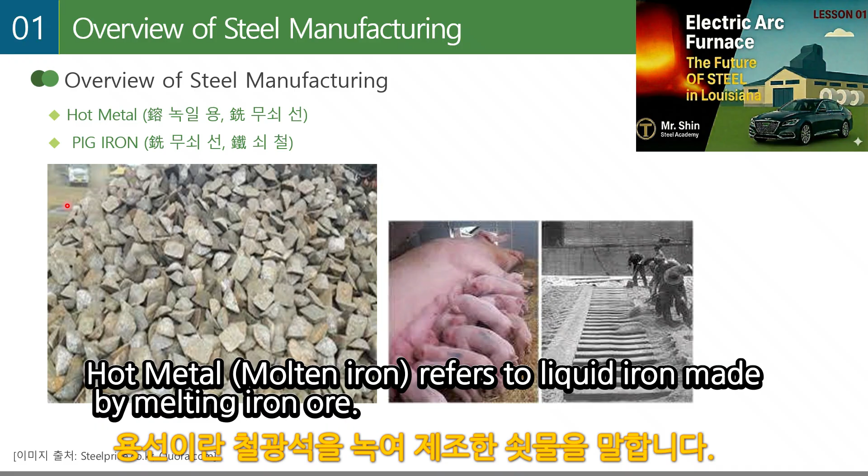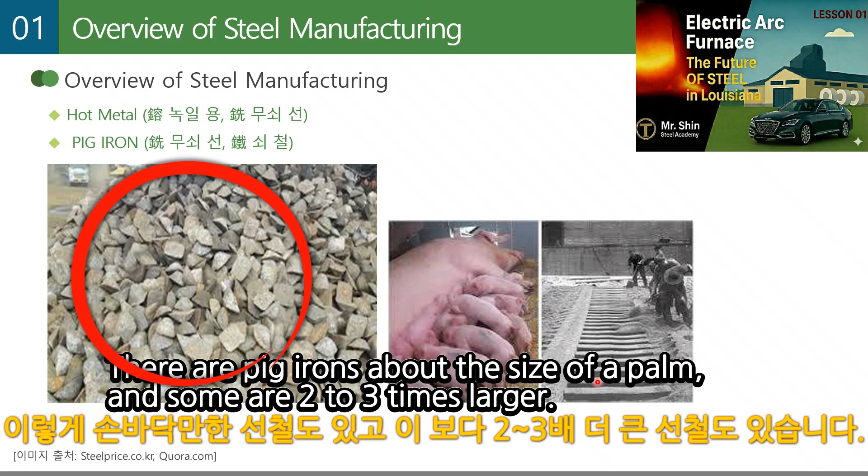Hot metal, or molten iron, refers to liquid iron made by melting iron ore. Pig iron is iron produced by pouring liquid molten iron into a mold called a pig casting machine. Let's look at pig iron, figure 1. There are pig irons about the size of a palm, and some are 2 to 3 times larger.

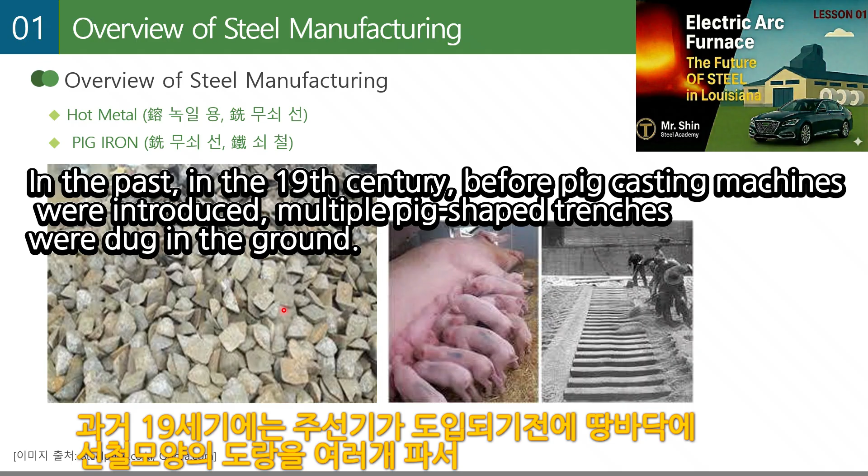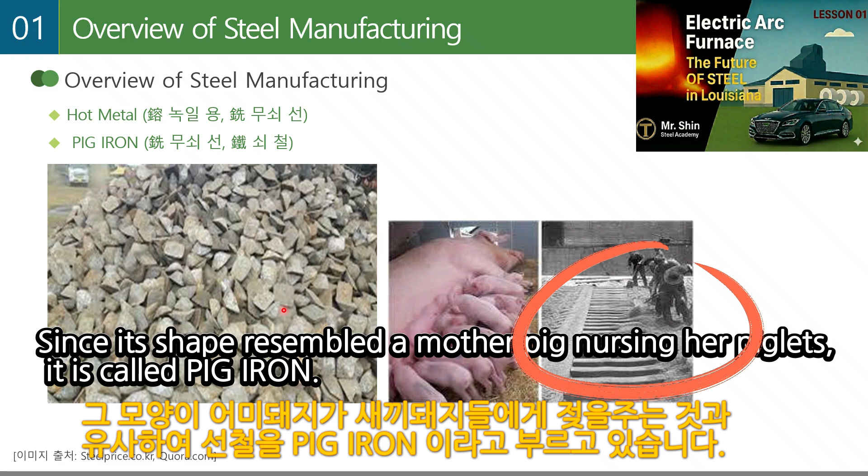In the past, in the 19th century, before pig casting machines were introduced, multiple pig-shaped trenches were dug in the ground. Molten iron was flowed into a central trench connected to the pig trenches to make pig iron. Since its shape resembled a mother pig nursing her piglets, it is called pig iron.

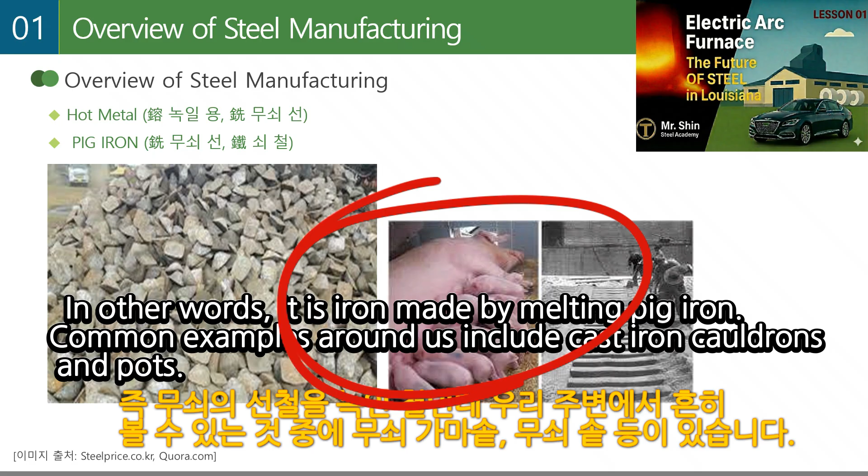Cast iron is iron produced by melting pig iron as a raw material. In other words, it is iron made by melting pig iron. Common examples around us include cast iron cauldrons and pots.

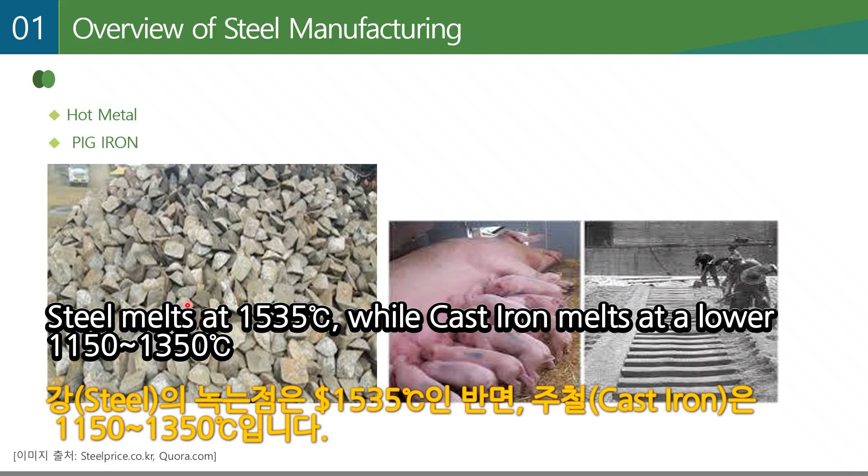Steel melts at 1535 degrees Celsius, while cast iron melts at a lower 1150 to 1350 degrees Celsius. Cast iron is iron produced by melting pig iron as a raw material. Cast iron is more brittle and has lower thermal conductivity than steel.

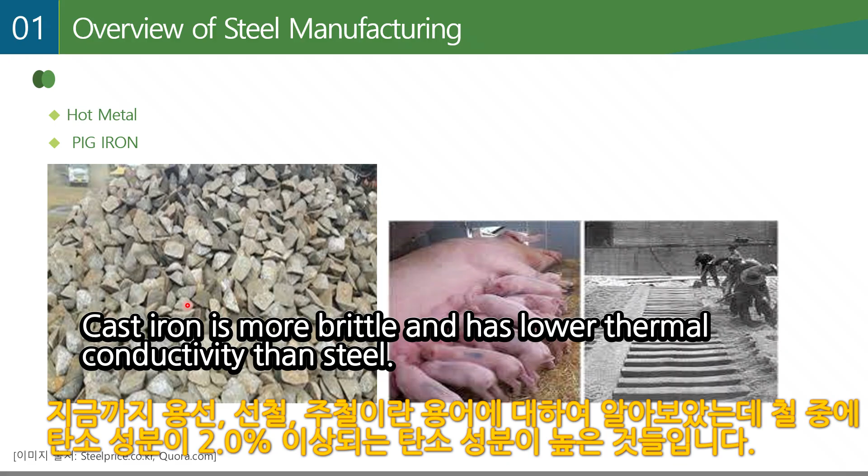Why do we grill pork belly on cast iron, with thermal conductivity about 1.5 times lower than steel? The meat cooks gently without burning, making it even tastier. However, due to high brittleness, the pot can crack if dropped.

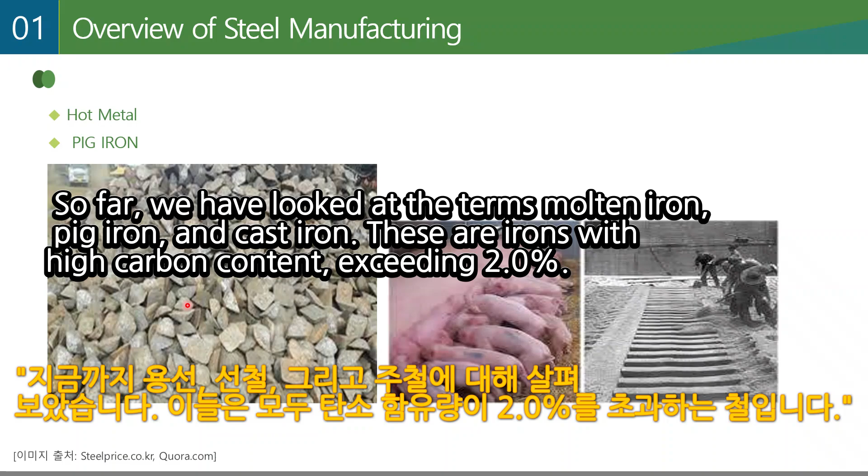So far, we have looked at the terms molten iron, pig iron, and cast iron. These are irons with high carbon content exceeding 2%. Molten steel is liquid iron manufactured with a low carbon content of 2% or less.

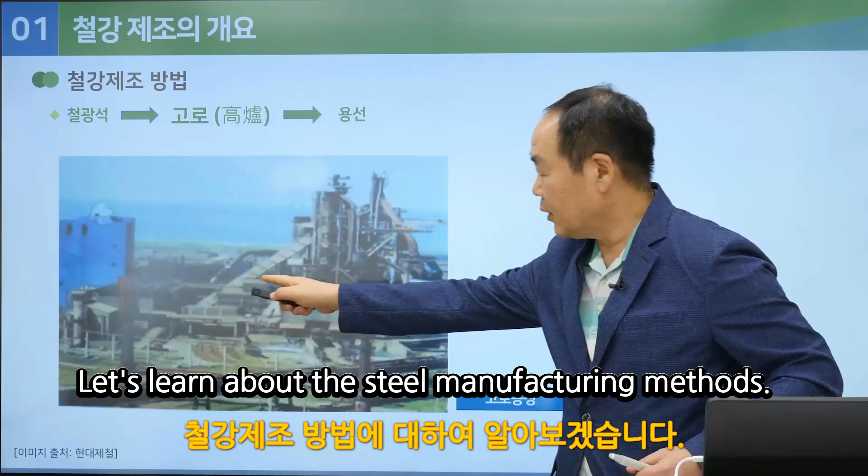Let's learn about the steel manufacturing methods. The blast furnace method is a manufacturing process that melts iron ore to make molten iron. Figure 2 shows a blast furnace plant. Due to its characteristics, most blast furnace facilities are very high, exceeding 100 meters.

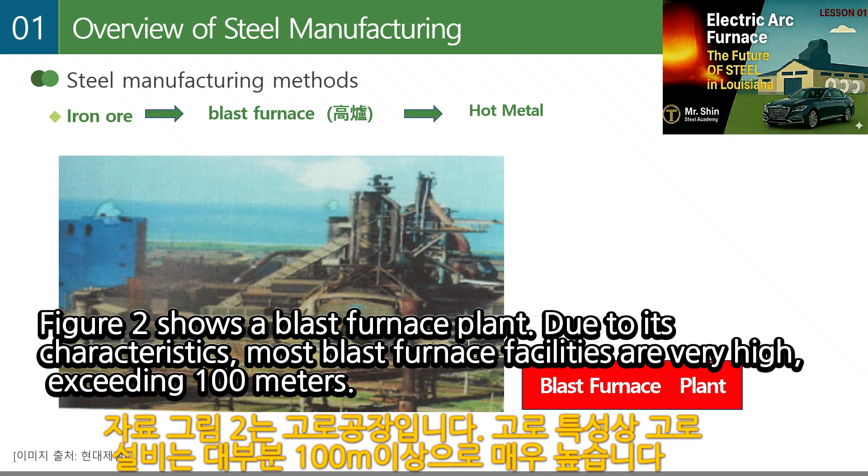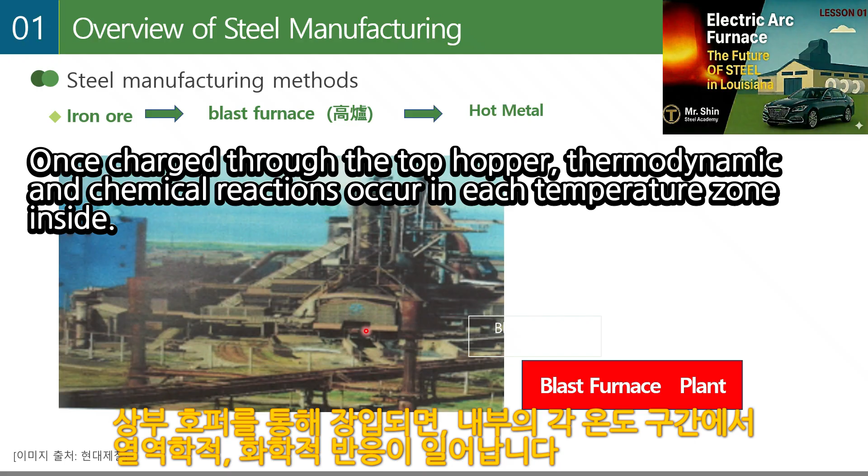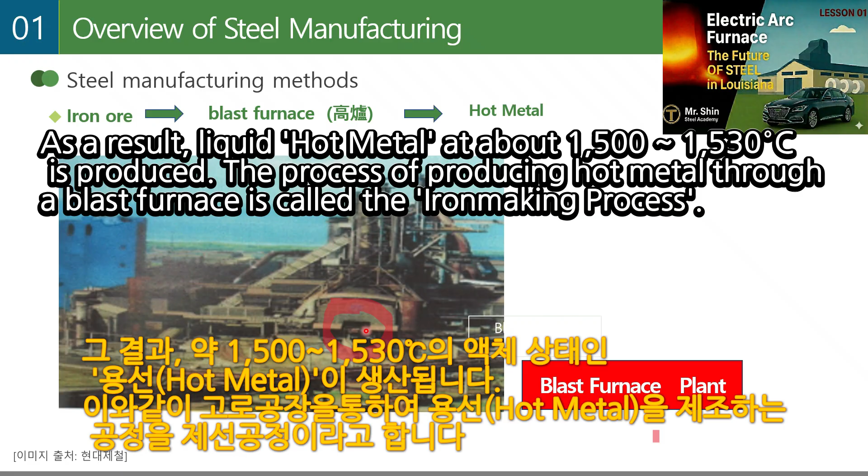Main materials like iron ore, and auxiliary materials like coke and lime, move to the top. Once charged through the top hopper, thermodynamic and chemical reactions occur in each temperature zone inside. As a result, liquid hot metal at about 1500 degrees Celsius is produced. The process of producing hot metal through a blast furnace is called the iron-making process.

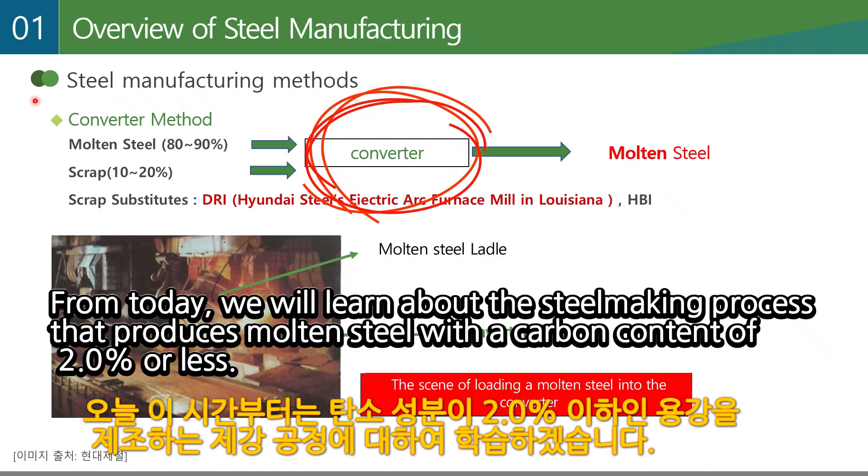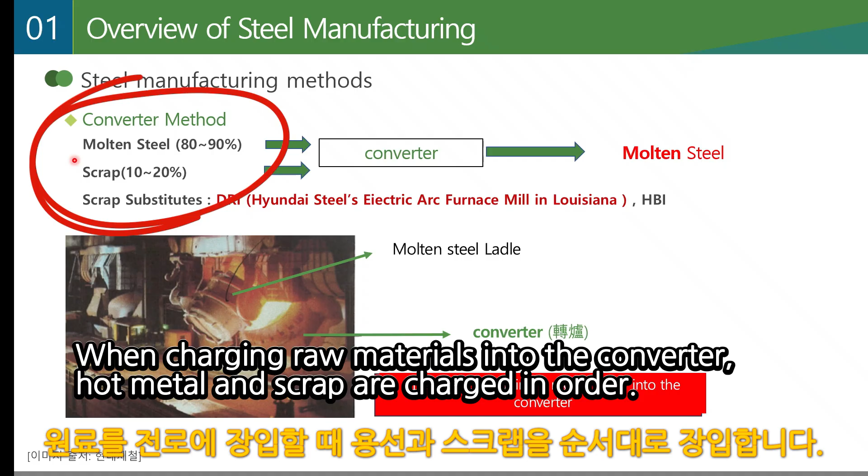From today, we will learn about the steel-making process that produces molten steel with a carbon content of 2% or less. The converter method produces molten steel using molten iron from blast furnaces and scrap, with a ratio of about 8 to 2. When charging raw materials into the converter, hot metal and scrap are charged in order.

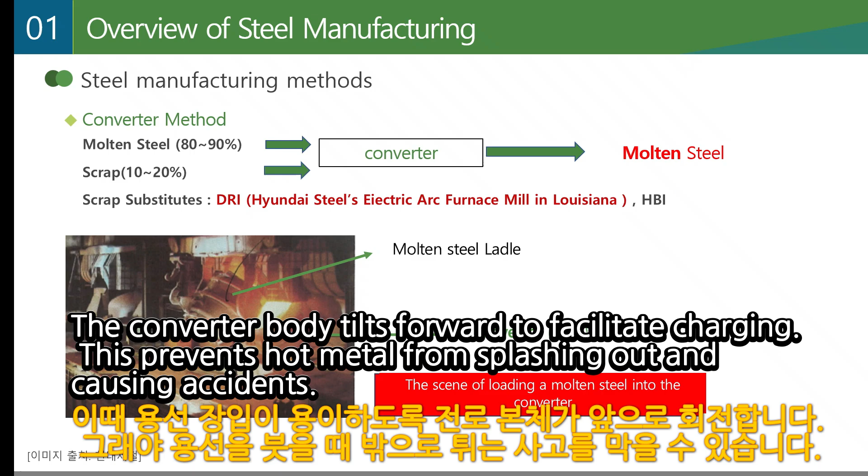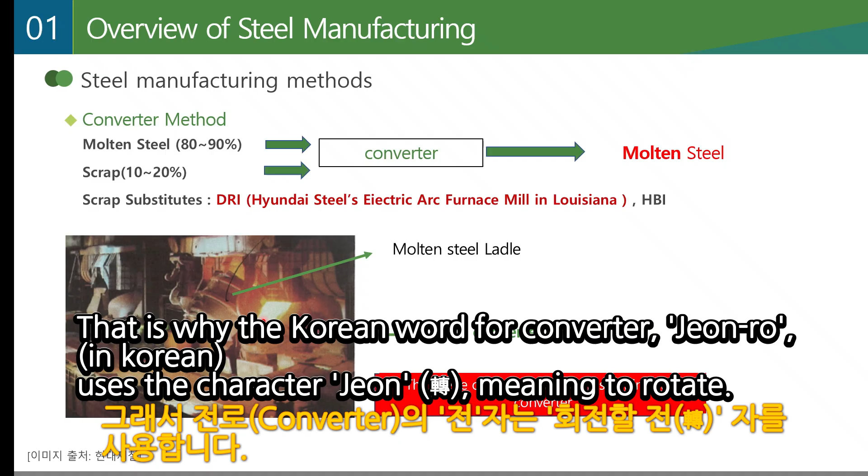The converter body tilts forward to facilitate charging. This prevents hot metal from splashing out and causing accidents. Conversely, when tapping molten steel, the converter tilts in the opposite direction to pour it into a ladle. That is why the Korean word for converter, Jeon-ro, uses the character Jeon, meaning to rotate.

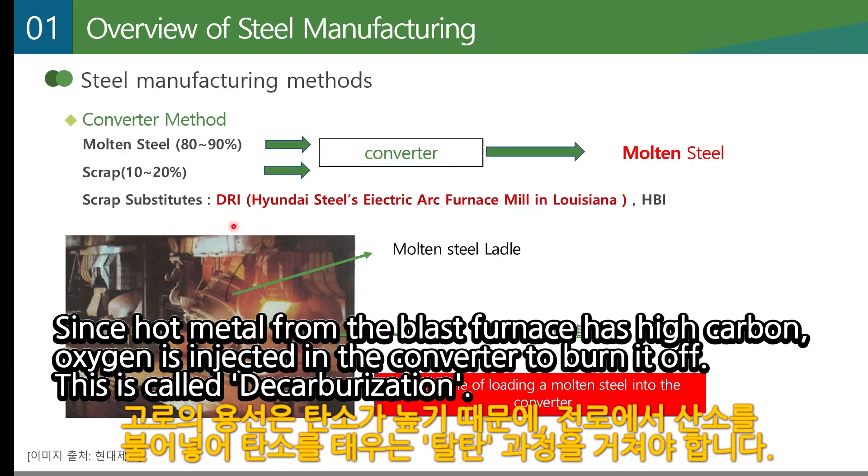Since hot metal from the blast furnace has high carbon, oxygen is injected in the converter to burn it off. This is called decarburization. That's why the converter is also called BOF, basic oxygen furnace. This corresponds to the primary refining process.

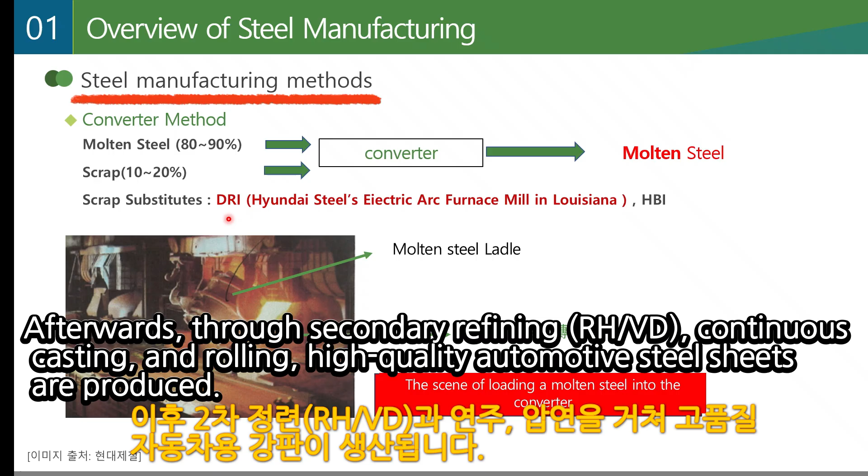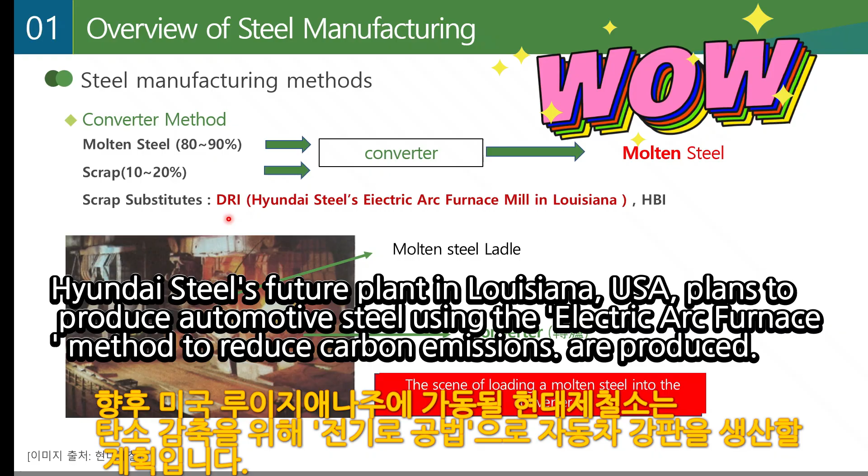Afterwards, through secondary refining, RH/VD, continuous casting and rolling, high-quality automotive steel sheets are produced. Hyundai Steel's future plant in Louisiana, USA, plans to produce automotive steel using the electric arc furnace method to reduce carbon emissions.

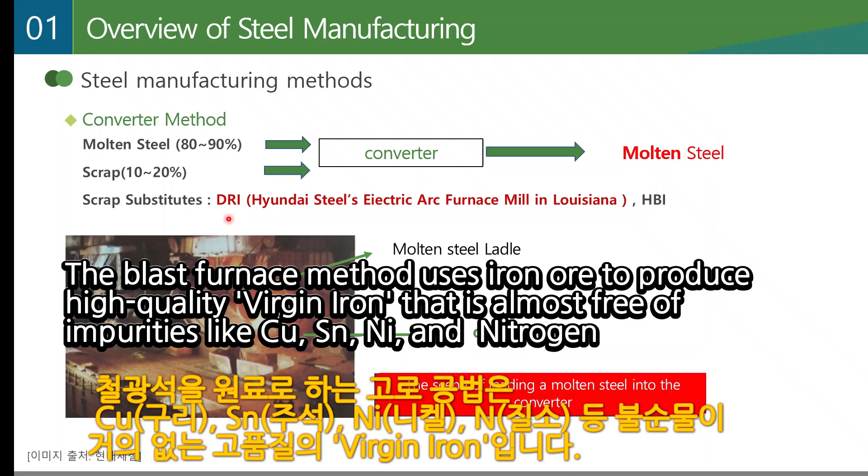The blast furnace method uses iron ore to produce high-quality virgin iron that is almost free of impurities like Cu, Sn, Ni, and nitrogen, which is why it is capable of producing automotive steel sheets for exterior panels.

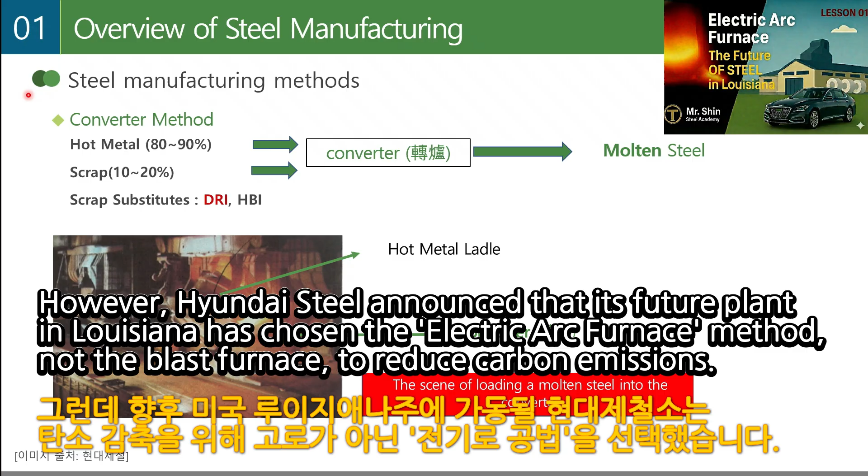However, Hyundai Steel announced that its future plant in Louisiana has chosen the electric arc furnace method, not the blast furnace, to reduce carbon emissions, and that they would produce automotive steel sheets using this method.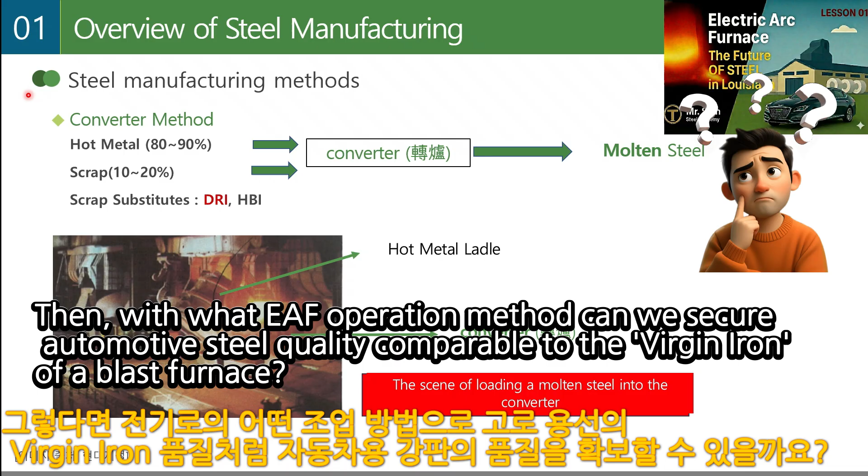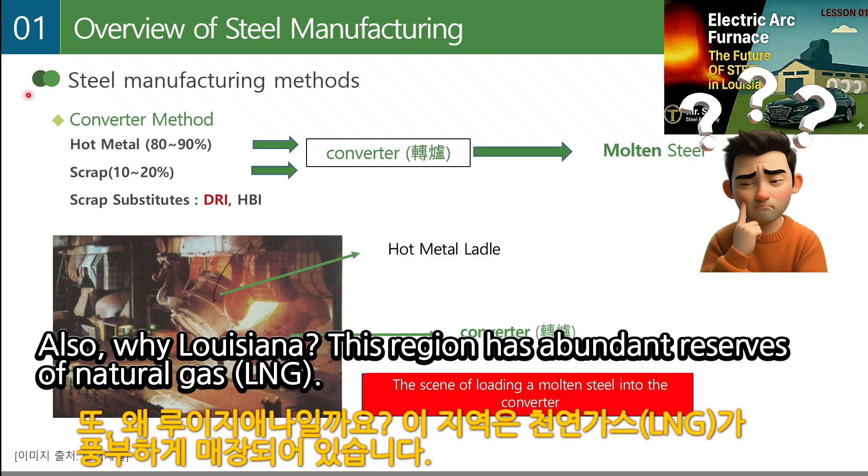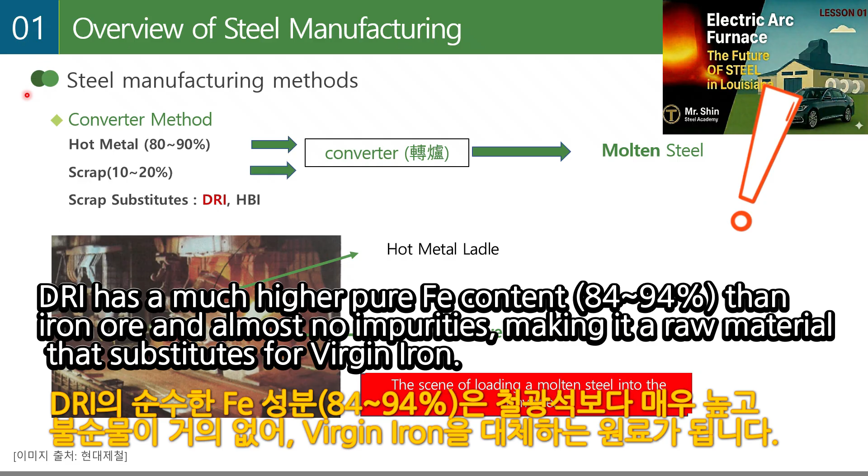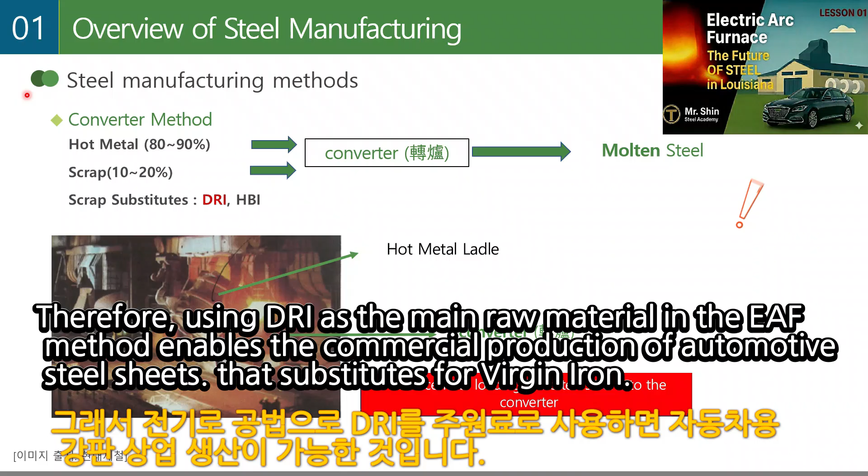With what EAF operation method can we secure automotive steel quality comparable to the virgin iron of a blast furnace? Why Louisiana? This region has abundant reserves of natural gas, LNG. By using this natural gas to remove oxygen from iron at high temperatures, we can obtain DRI, direct reduced iron. DRI has a much higher pure Fe content, 84-94%, than iron ore and almost no impurities, making it a raw material that substitutes for virgin iron. Therefore, using DRI as the main raw material in the EAF method enables the commercial production of automotive steel sheets that substitutes for virgin iron.

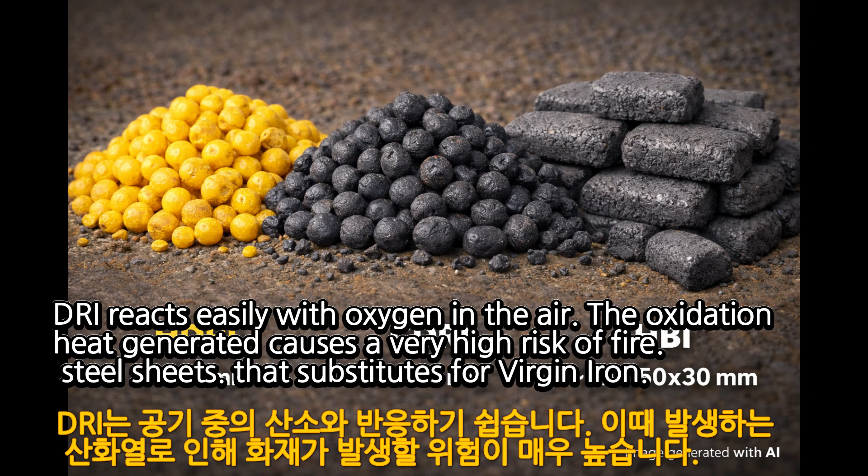DRI reacts easily with oxygen in the air. The oxidation heat generated causes a very high risk of fire. To prevent such fires, nitrogen purging is legally mandatory during DRI storage, transport, and use.

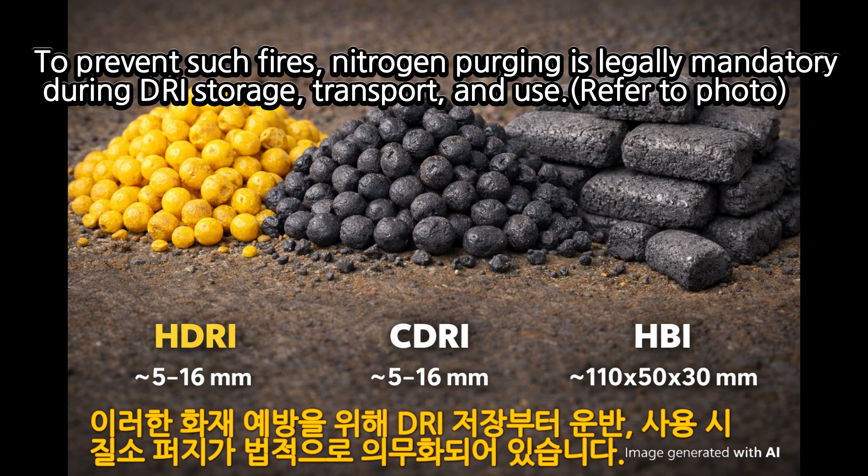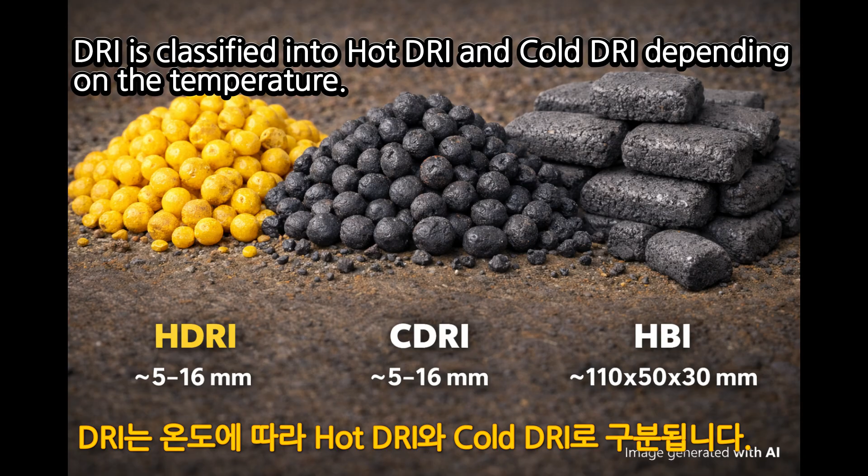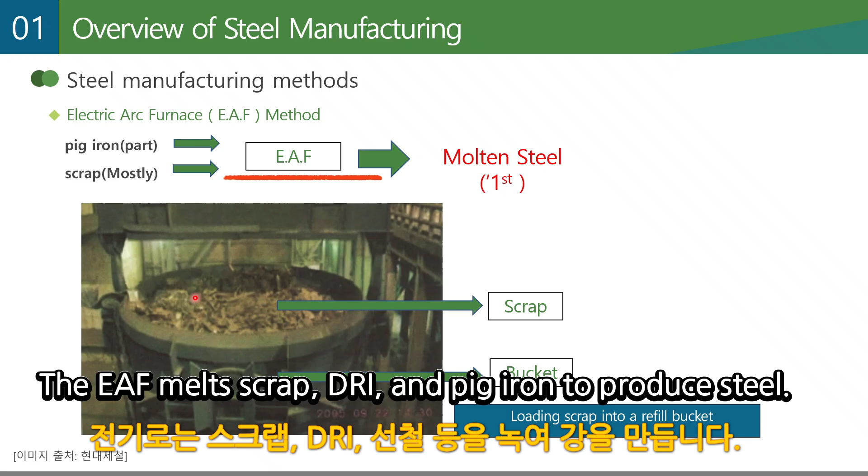HBI, hot briquetted iron, is made by compressing hot DRI under high pressure into a shape like a foldable phone. DRI is classified into hot DRI and cold DRI depending on the temperature. The Louisiana plant is expected to use high-quality scrap and simultaneously employ a method of charging hot DRI directly into the electric furnace. EAF melts scrap, DRI, and pig iron to make steel.

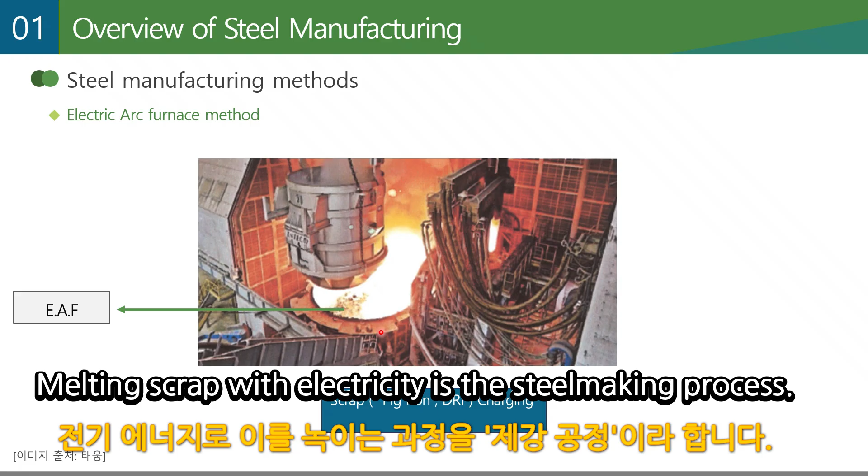This is a charging bucket used to load scrap. Scrap is charged from the bucket into the furnace. Melting scrap with electricity is the steel-making process. The operation sequence is charging, power on, melting, refining, tapping. For melting, power is applied to graphite electrodes to melt the scrap.

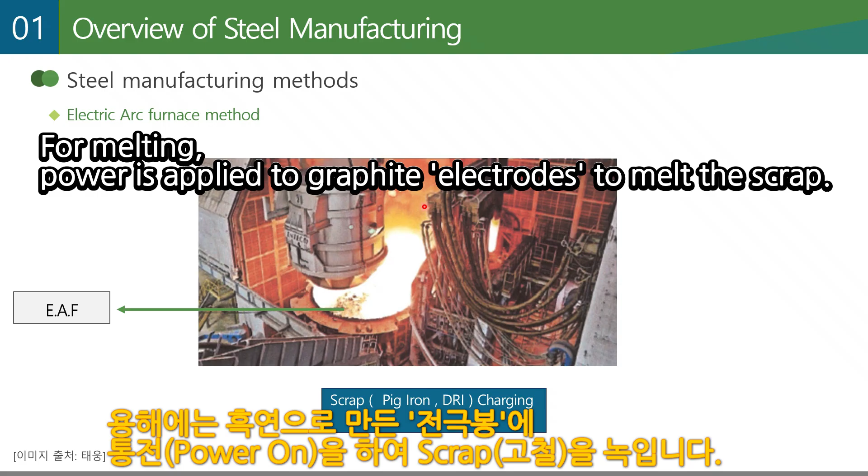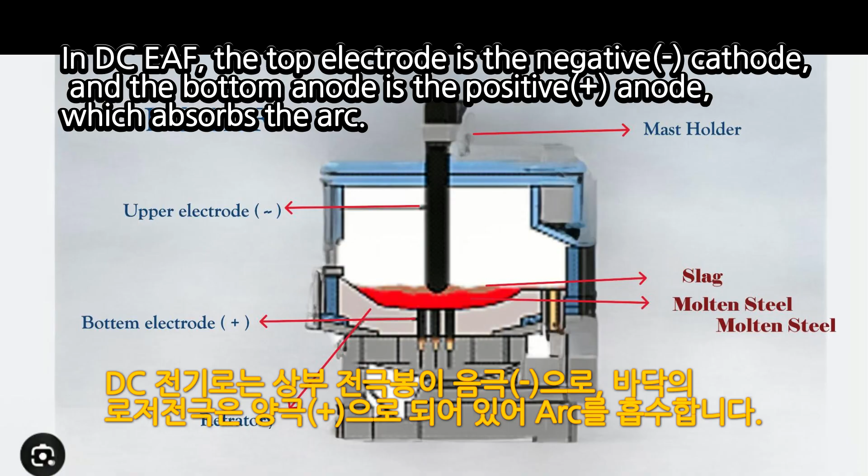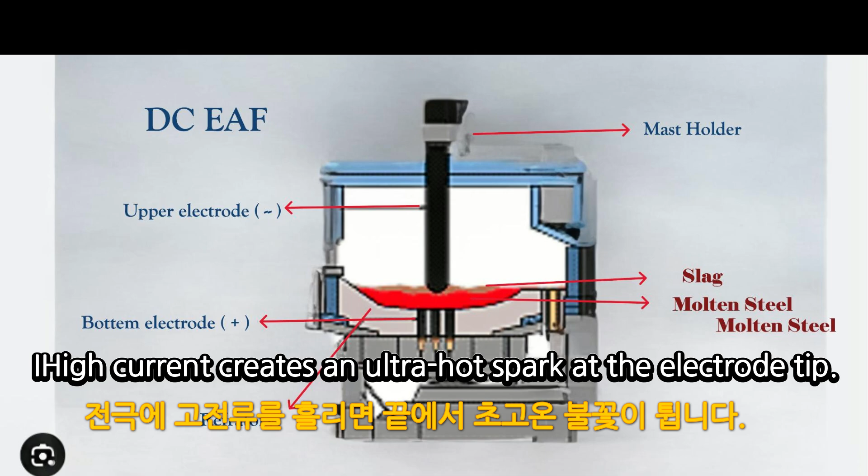Traditional DC furnaces used 1 electrode, 150-ton class. Recent 400-ton furnaces are evolving into twin cathode types. Tokyo Steel's Tahara plant operates this twin electrode type. POSCO Gwangyang plant will also adopt this type in June 2026. Hyundai Steel Louisiana will likely use a similar DC EAF.

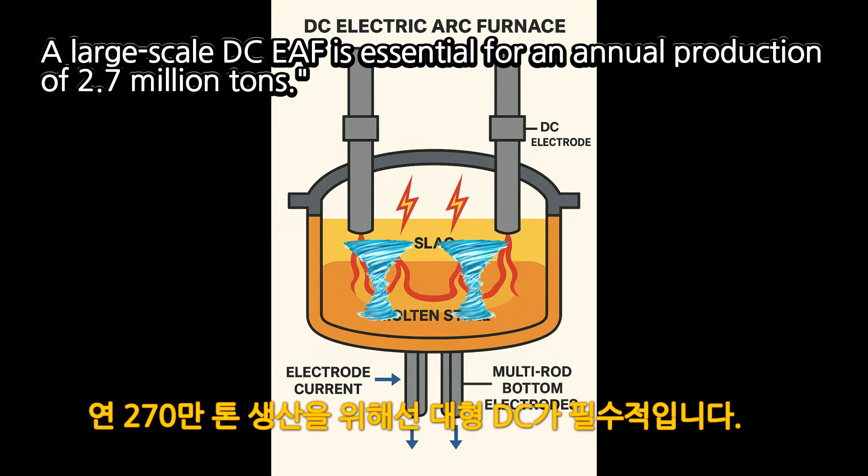DC offers superior stirring, ensuring uniform steel quality. Easy impurity removal makes it ideal for automotive steel. A large-scale DC EAF is essential for an annual production of 2.7 million tons.

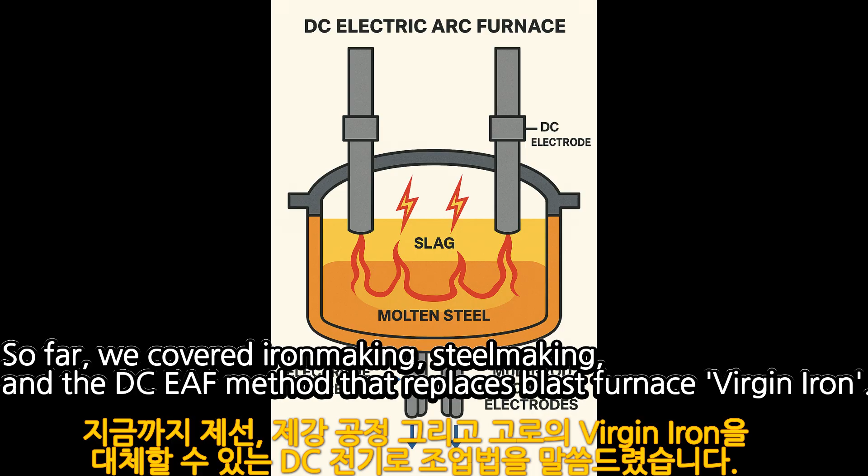So far, we covered iron making, steel making, and the DC EAF method that replaces blast furnace virgin iron. Now, we are entering a crucial phase to truly understand the EAF process. But everyone, please don't worry. With my decades of practical field experience, I will explain it in the easiest way possible.

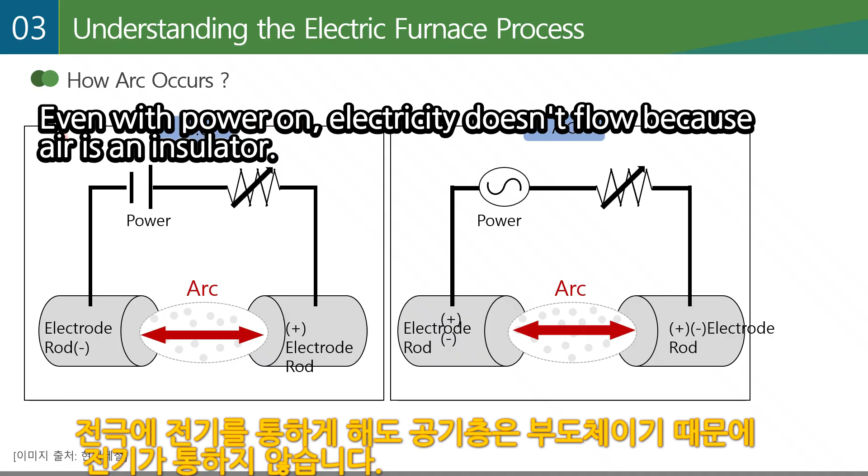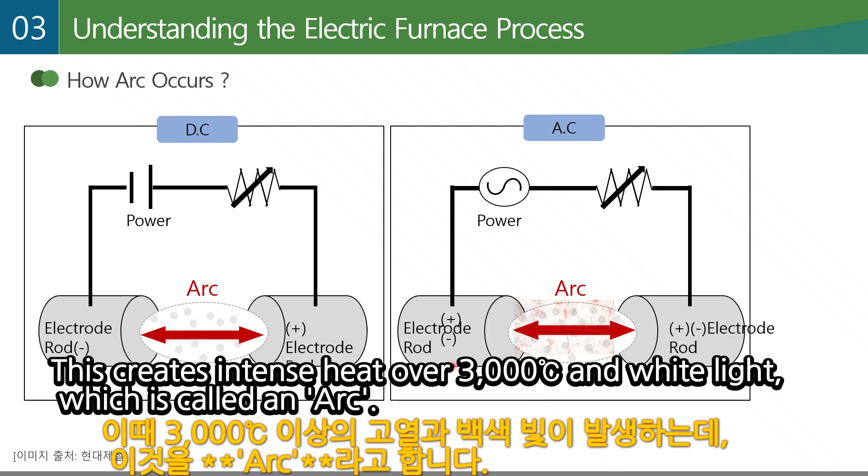Let's look at what an arc is and how it is generated. Even with power on, electricity doesn't flow because air is an insulator. However, applying very high voltage forces current to flow through the air. This creates intense heat over 3,000 degrees Celsius and white light. This phenomenon occurring in the air is called arc discharge. If scrap is between the electrodes, it acts as a medium and melts.

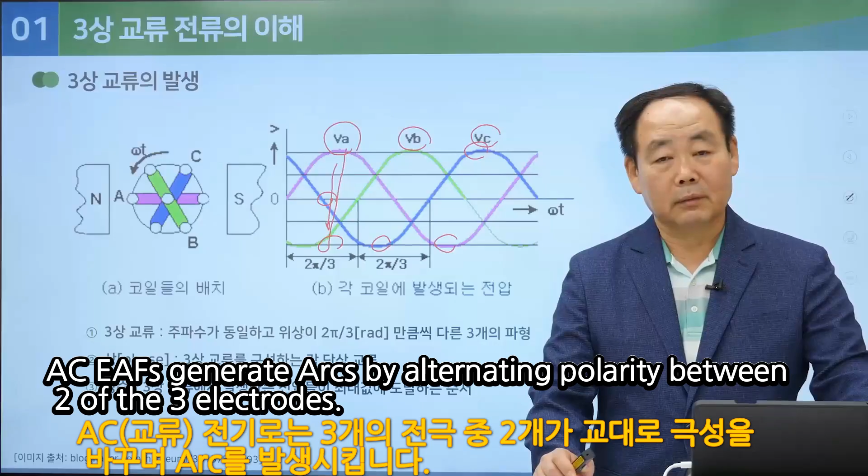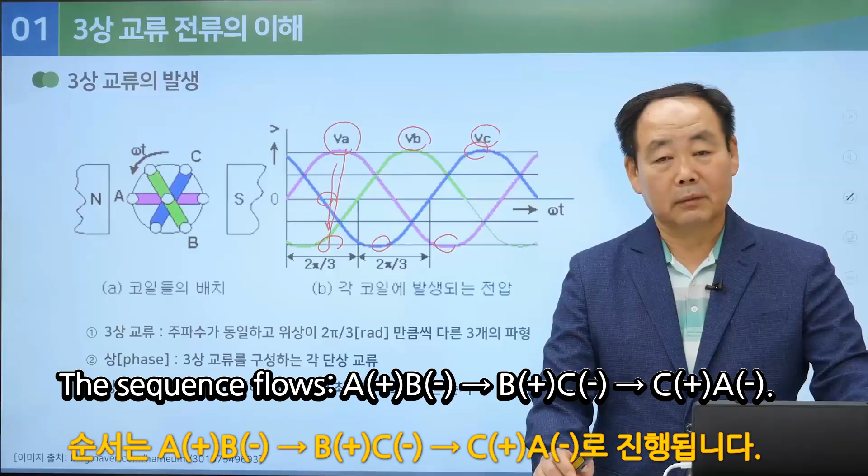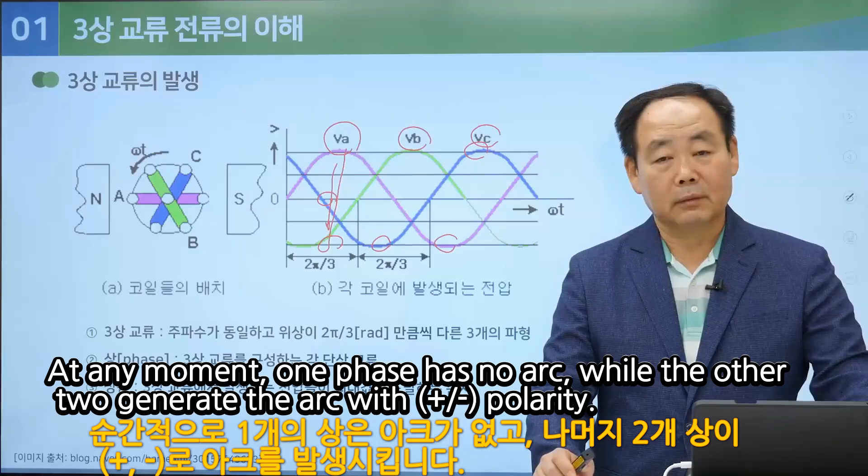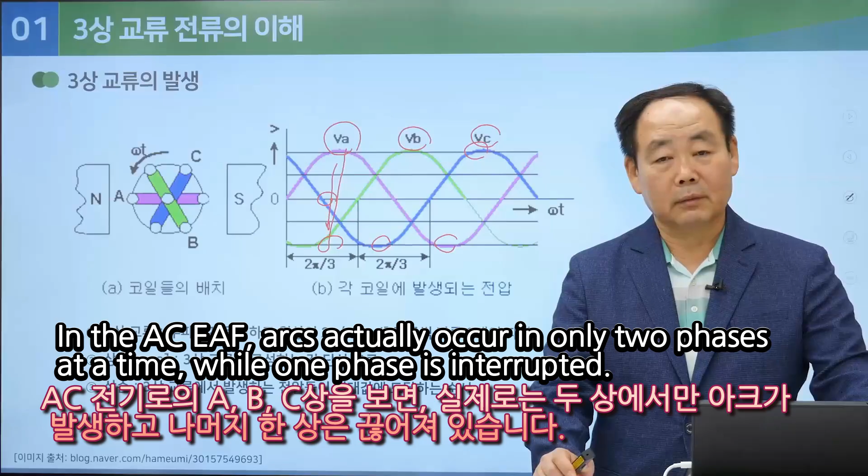AC EAFs generate arcs by alternating polarity between 2 of the 3 electrodes. It switches 60 times per second, 60 Hz, creating powerful arcs. The sequence flows A plus B, B plus C, C plus A. At any moment, one phase has no arc, while the other 2 generate the arc with plus or minus polarity. The resulting arc column bends into a curved shape due to the magnetic field. In the AC EAF, arcs actually occur in only 2 phases at a time, while one phase is interrupted. However, alternating at 60 Hz, it looks like continuous arcs.

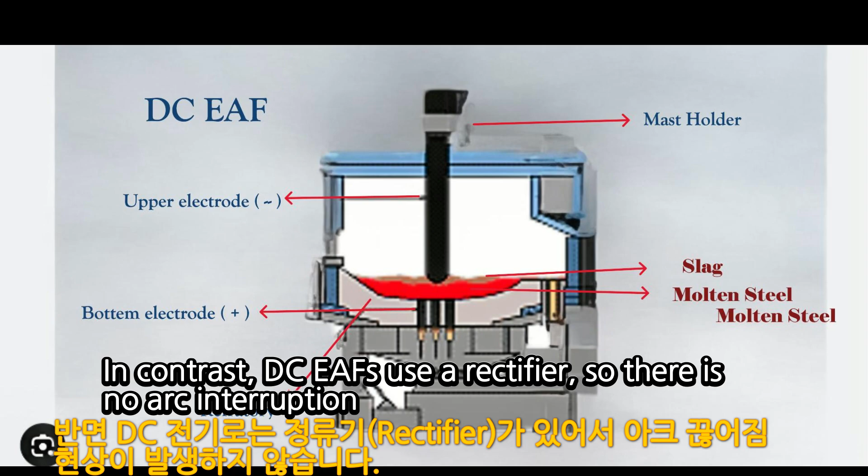This can be observed from all three electrodes when viewed through cobalt glasses. In contrast, DC EAFs use a rectifier, so there is no arc interruption.

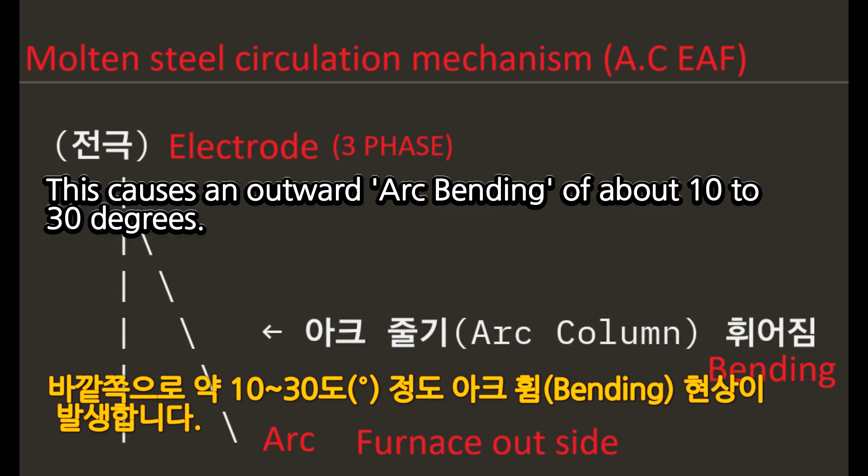This will be explained in detail in the future EAF equipment lesson. This causes an outward arc bending of about 10 to 30 degrees. Therefore, due to Lorentz's law, the molten steel in an AC EAF normally rotates in a counterclockwise direction.

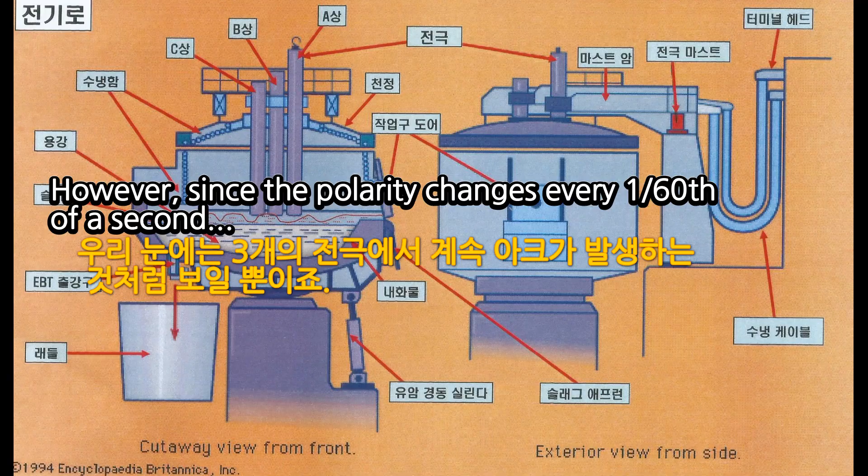If you open the slag door and look inside wearing cobalt safety glasses, you can actually observe the slag layer rotating counterclockwise. However, since the polarity changes every 1/60th of a second, we will wrap up the AC theory here and cover it in detail in the future EAF equipment lesson.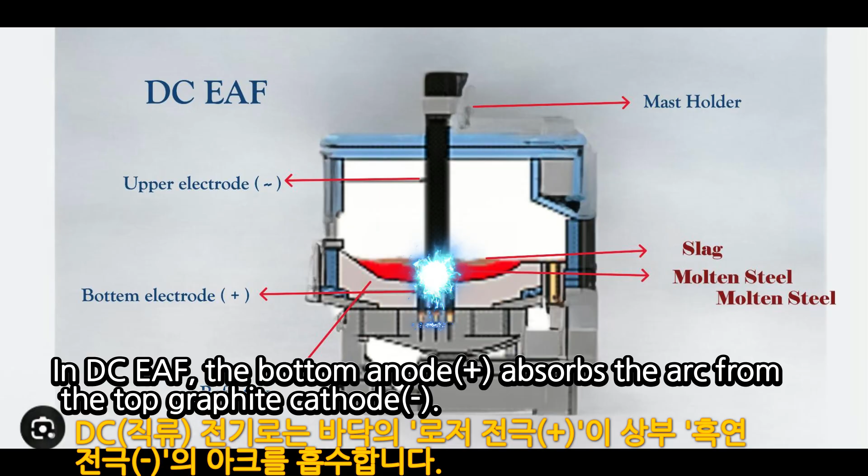In DC EAF, the bottom anode absorbs the arc from the top graphite cathode. The scrap positioned in between is melted by the heat of this arc.

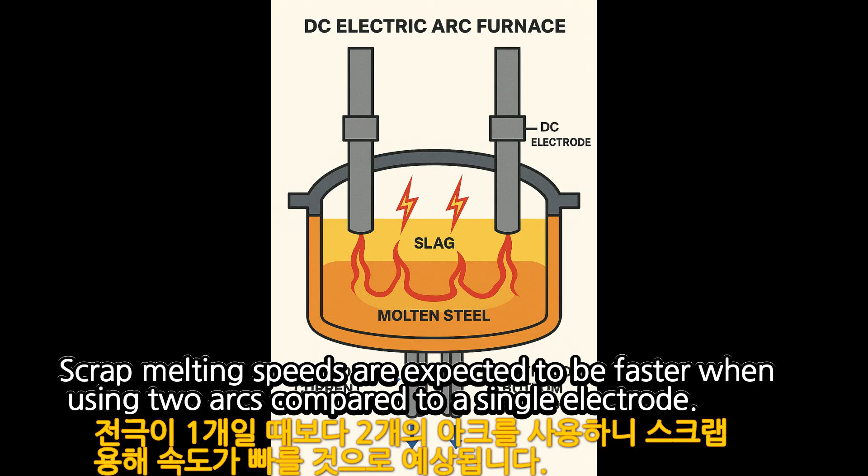Large DC EAFs with two top electrodes have bottom electrodes aligned 1:1 symmetrically, multi-rod type. Scrap melting speeds are expected to be faster when using two arcs compared to a single electrode. Also, the molten steel stirring force surging from the bottom to the top is expected to be excellent.

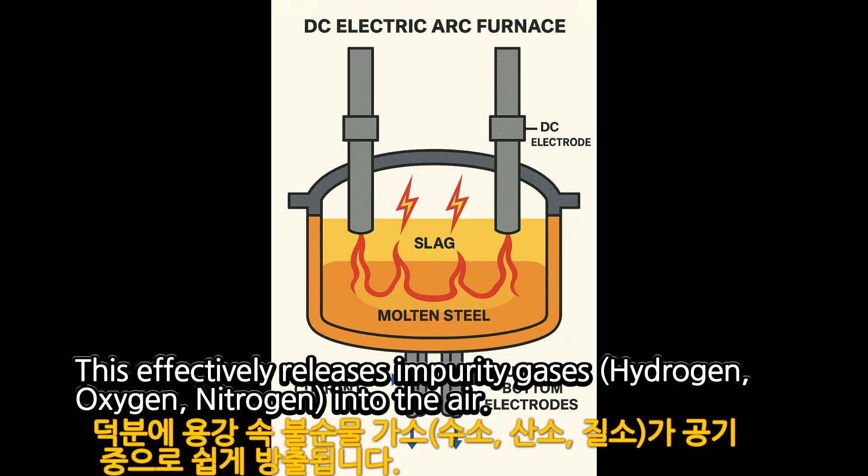This effectively releases impurity gases—hydrogen, oxygen, nitrogen—into the air. Naturally, this results in superior steel cleanliness.

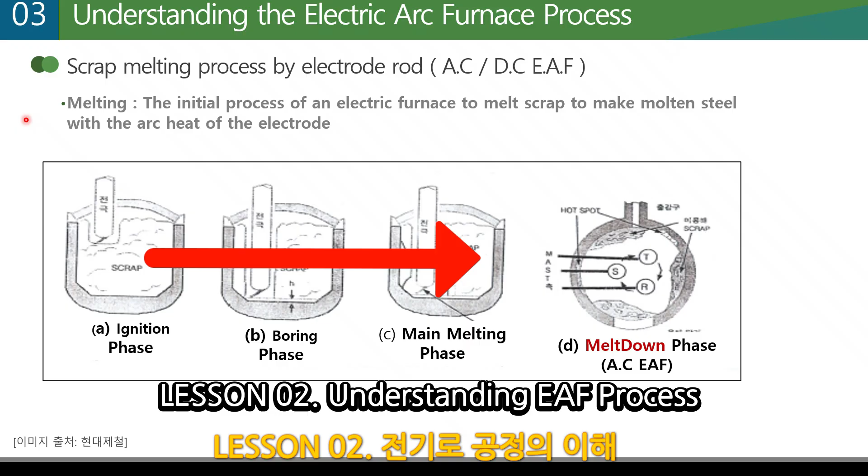In Lesson 01, we learned about the principles of how scrap is melted in the EAF method. Lesson 02: Understanding the EAF Process. This figure shows the progression sequence of the electric furnace melting period.

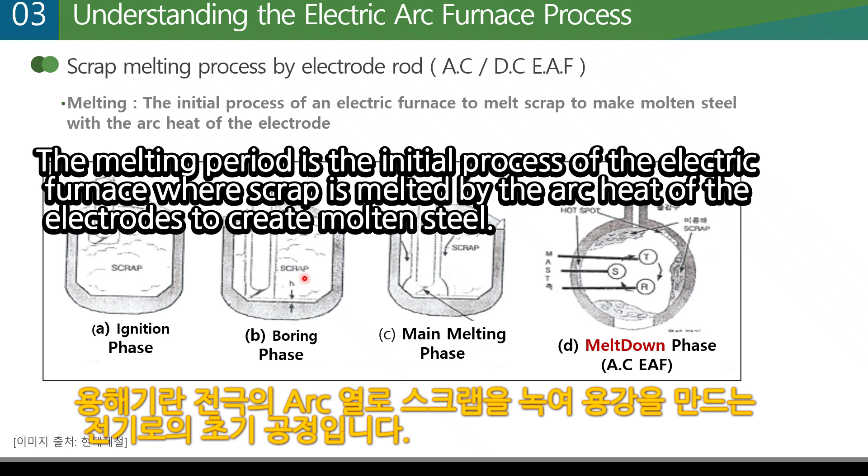The melting period is the initial process of the electric furnace where scrap is melted by the arc heat of the electrodes to create molten steel. From the beginning of the melting period, oxygen is injected from the shell burner to shorten the melting time.

As we move from left A to right C, the electrodes tunnel through and melt the scrap using arc heat. Eventually, it reaches the point where most of the scrap is melted, as shown in D.

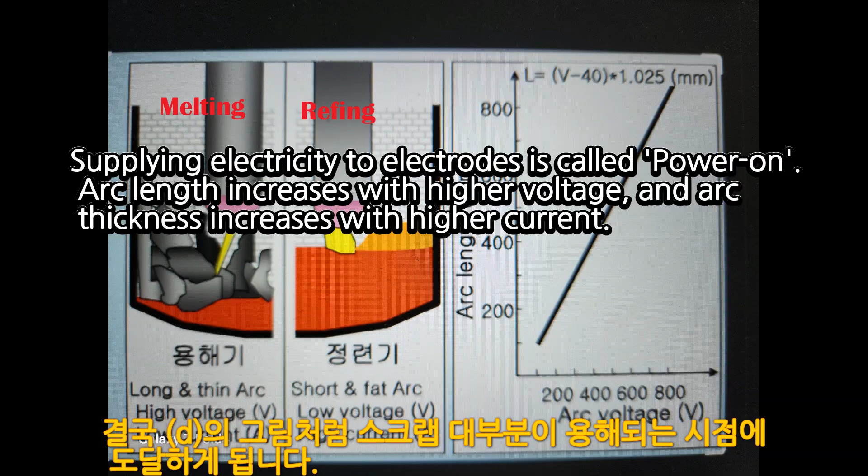Supplying electricity to electrodes is called power on. Arc length increases with higher voltage, and arc thickness increases with higher current.

Figure A is the initial power-on stage, called the ignition period, where low voltage is used to prevent damage to the furnace roof from the arc.

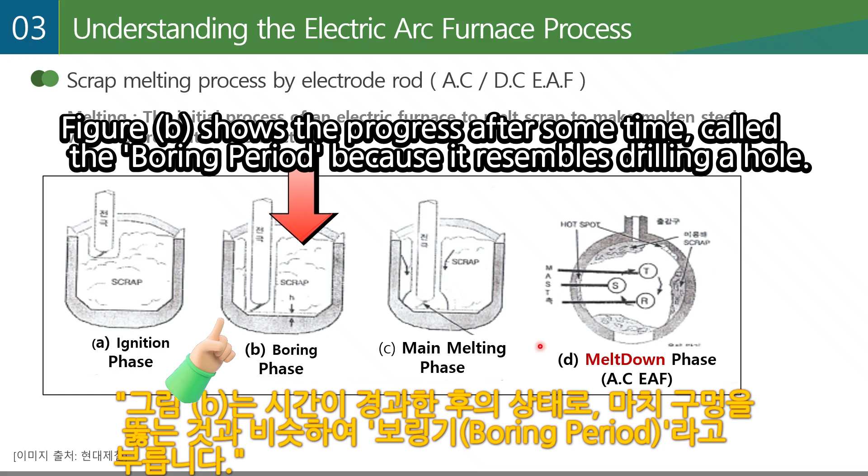Figure B shows the progress after some time, called the boring period because it resembles drilling a hole. At this stage, high voltage is used to increase the boring speed to the furnace bottom, referred to as long arc operation. Figure C is the main melting stage, where molten steel forms with slag on top.

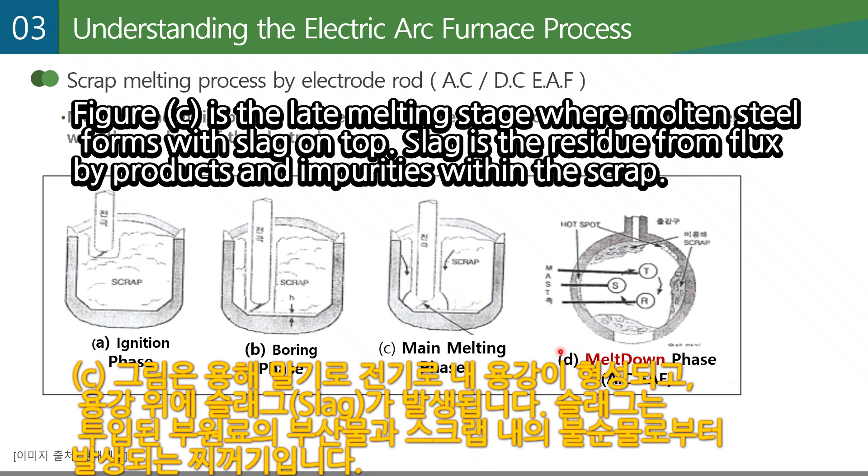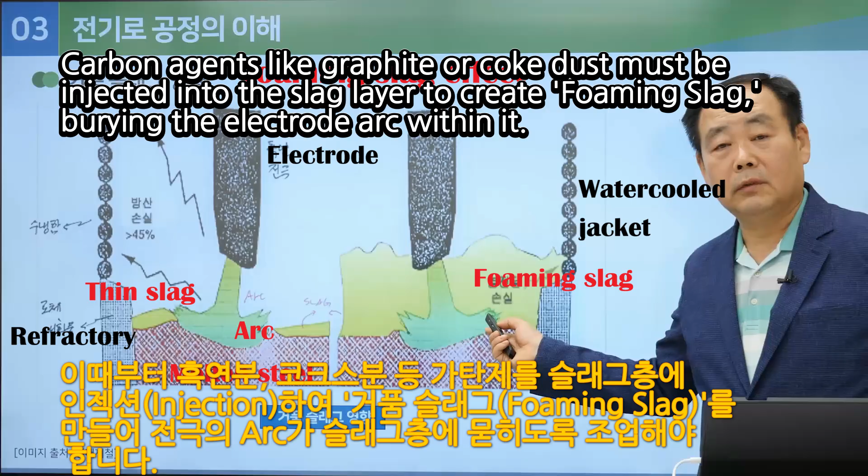Slag is the residue from flux, byproducts, and impurities within the scrap. Carbon agents like graphite or coke dust must be injected into the slag layer to create foaming slag, burying the electrode arc within it. Injection means projecting materials into the slag layer at high pressure through a pipe.

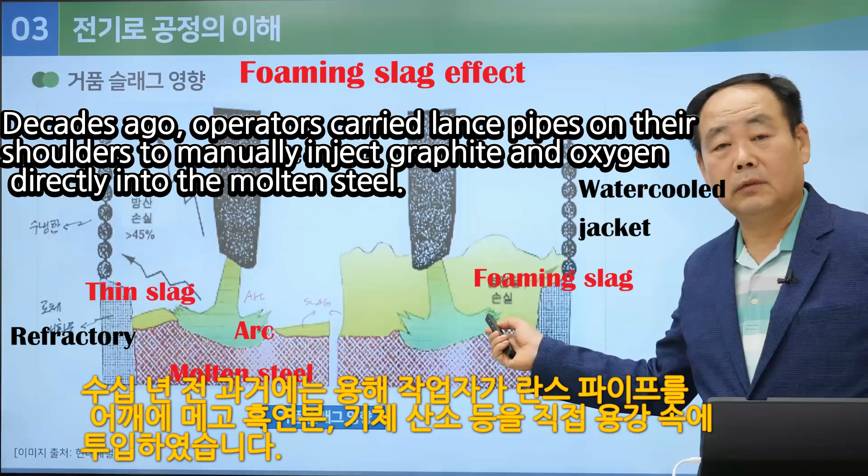Decades ago, operators carried lance pipes on their shoulders to manually inject graphite and oxygen directly into the molten steel. Today, this process is robotized with water-cooled manipulators, allowing operators to safely control injection remotely from the control room.

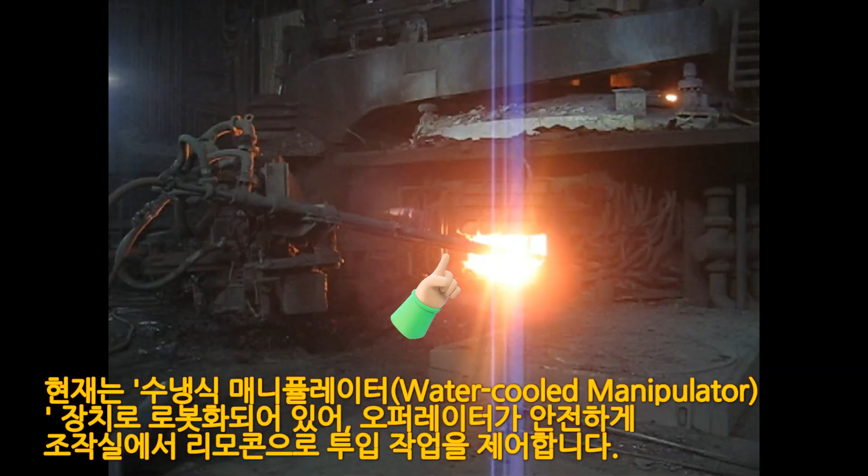This image shows the operation floor of a 50-ton EAF. The circled part is the water-cooled lance manipulator, currently in its home position. Continuous air injection from the nozzle during movement and operation prevents clogging caused by slag.

Key point: from the start of meltdown, oxygen and graphite carbon are injected together to create foaming slag. A breakdown of this device creates an emergency—it is vital, lifeline-like equipment for melting operations.

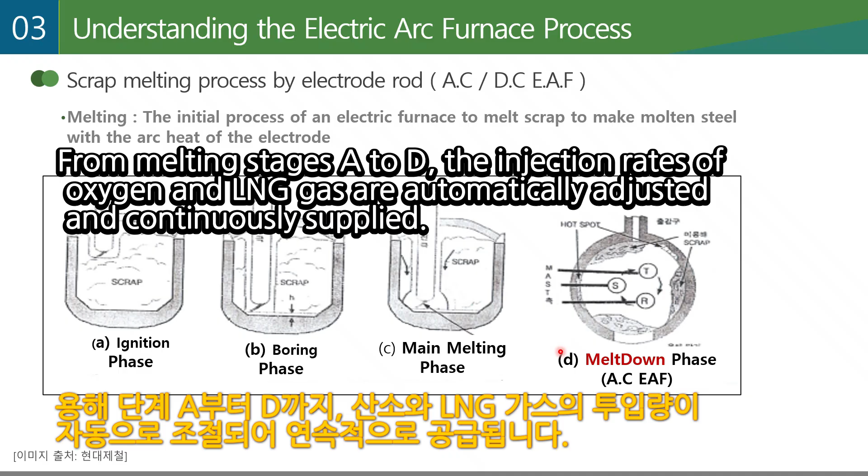From melting stages A to D, the injection rates of oxygen and LNG gas are automatically adjusted and continuously supplied. At the final melting stage, D, when more than 70% of the scrap is melted, it is called meltdown. This marks the completion of the melting period.

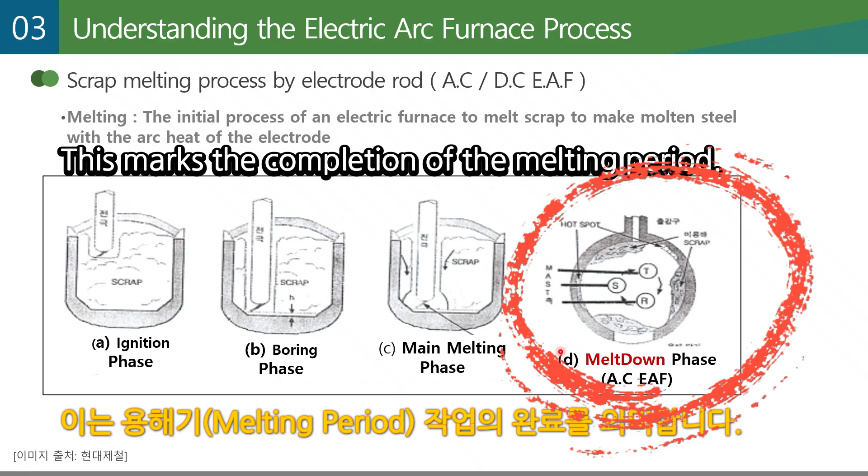In Lesson 03, we will cover the core areas of EAF operation: the importance of foaming slag after meltdown, oxidation, refining, and tapping.